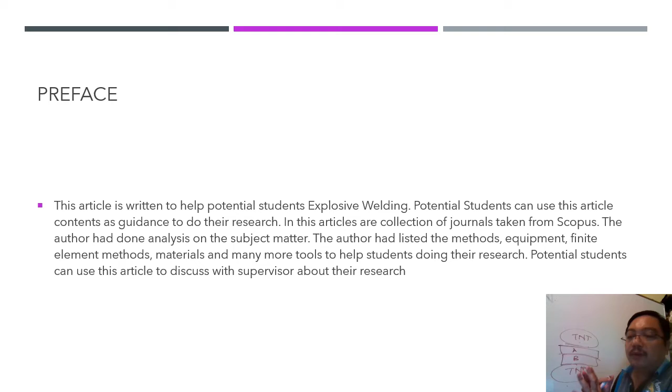You can use this video as a guidance, especially at the end of the video you can see the tools, the equipment, the software, the machinery, and all other things you might want when doing this kind of research or any other related research.

Many have done research on explosive welding. There are 485 results in ScienceDirect. You can go for Scopus, many results. You can go for Google Scholar, again many results on explosive welding.

Let us see. This is the potential for chapter one. Chapter one talks about the general statement. This is some of it: metallic powder directly deposited on titanium alloy, because some of the materials naturally cannot be connected to each other because of material size.

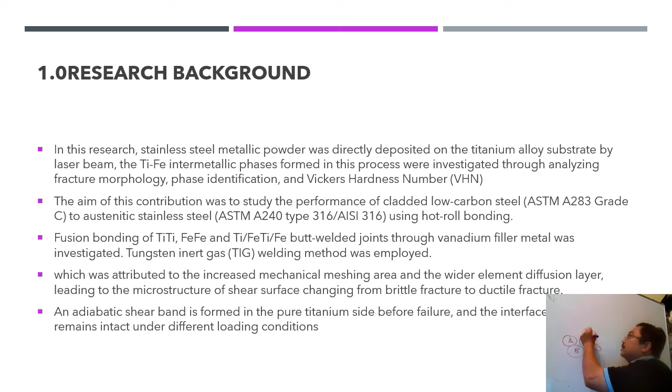Maybe the particle size sometimes is big. Particle A is big, so how can it connect to particle B, because it's the same size? You have to use tremendous force given by explosion, then it can connect. If you do the pressing, the forging, the power does not enough - the press power does not enough. You have to use explosion, and the heat from explosion is also very powerful to connect.

Then there's more contribution studying the performance of cladded low iron, low carbon steel using hot roll bonding, fusion bonding. This is another advantage when using explosive welding, because fusion bonding on different materials - materials that naturally cannot be connected - when provided with force and heat, can be connected.

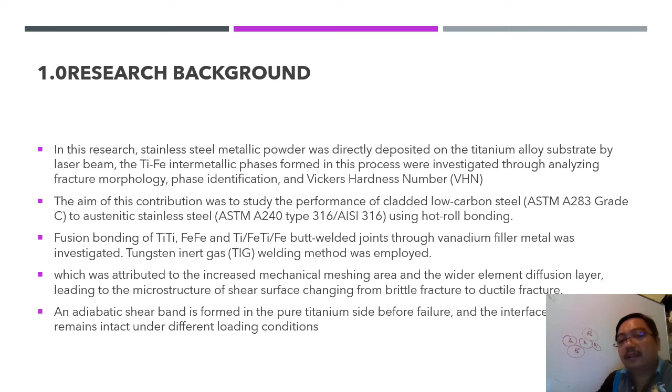Increase in mechanical meshing area, wider element diffusion layer, microstructure shear surface - maybe some of the material will become stronger, you do not know. And adiabatic shear band is formed in pure titanium before failure and everything. This is among the background research people have done.

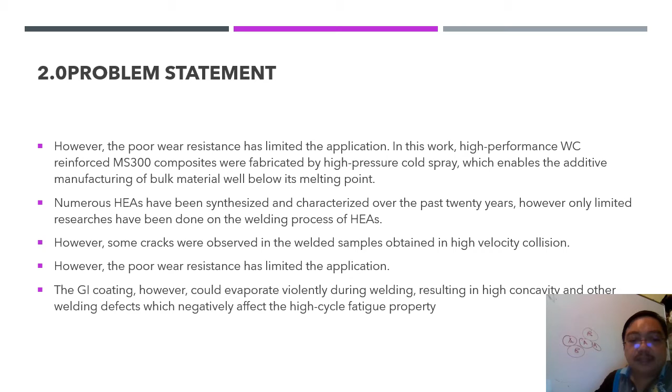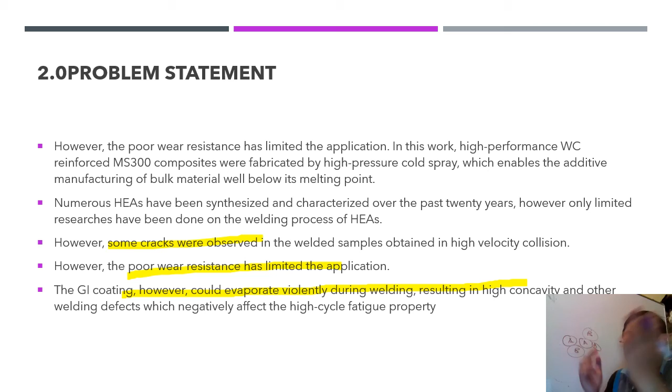This is the problem statement: poor resistance, of course, because the explosion time is so fast that it cannot be bonded together tightly, and cracks may happen - as I said, cracks may happen here - and poor wear resistance. Coating evaporated during welding, of course, because of high heat, so any coating can go away. This is among the problem statements that people have found, which may give you some idea to do your research.

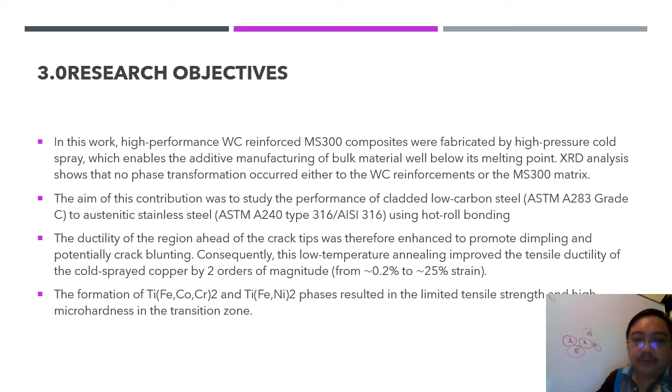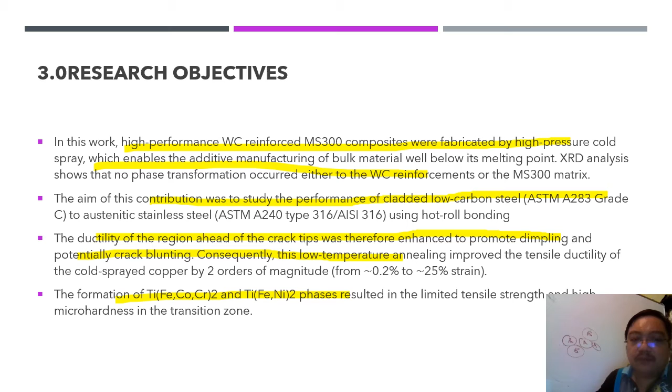This is the model research objective for high pressure cold spray performance of cladded low carbon steel. Ductility of the region ahead of the crack promotes dimpling and potentially crack blunting. Formation of titanium phases resulted in limited tensile strength.

This is micro hardness in the transition zone. This is among the problems, meaning that when you are connecting together because of explosion, the process is too fast, in milliseconds, and the joint part is not that strong. It's not that strong, the joint part. This is some of the problems that you have to encounter.

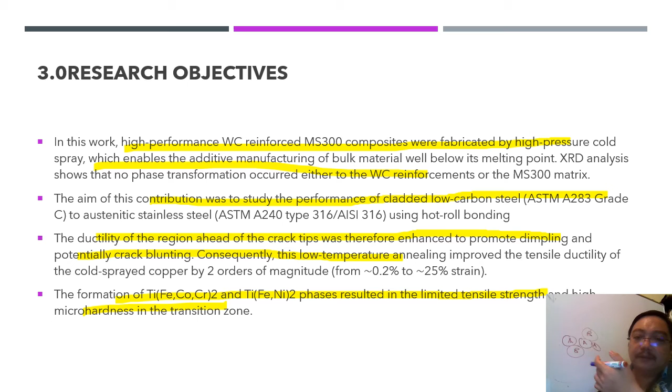This is some of the results that people have already done, and you can use ideas from it to expect your result. Maybe fortunately for you, before you are doing your research, you also have an idea what the outcome of your research will be.

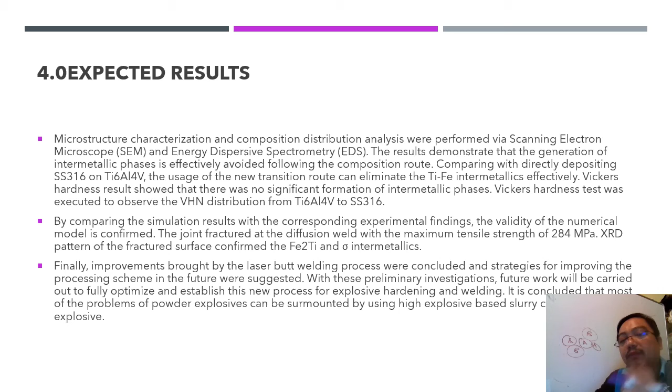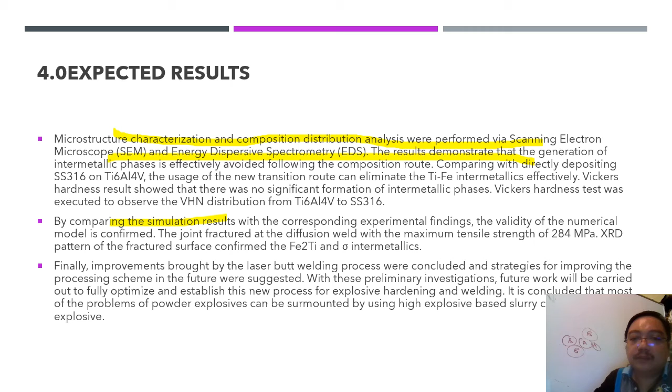This is microstructure characterization and composition performed by scanning electron microscope, energy dispersive spectrometry. Correspondingly, validity of the numerical model is confirmed. Some researchers use simulation, and then they predict what will happen. Then there's improvement brought by the laser butt welding process.

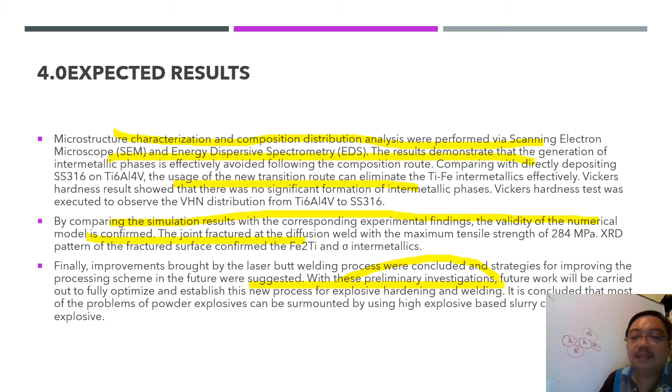All of these statements, I and my student, take from the abstract, and you can download the abstract for free from the internet if you have access to ScienceDirect. Of course your university must have the access. Most universities must have the access for ScienceDirect, so no problem.

This is the part that is interesting to you, because normally most students sometimes miss the experiment, they miss the analysis. This is what this video will help you with. This article will help you.

I put just a little. If you seriously want to do this research, you can acquire the full document at the end of the video. The tests I have just mentioned a little bit.

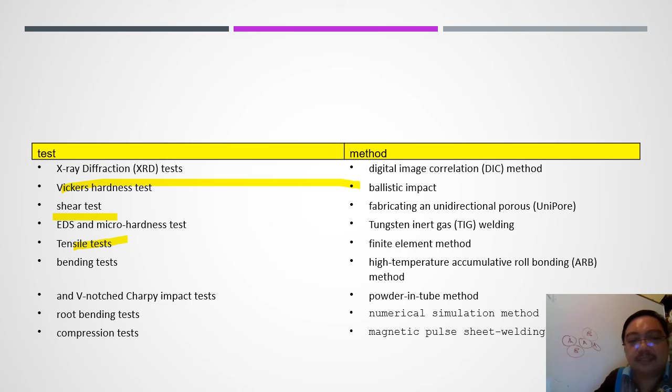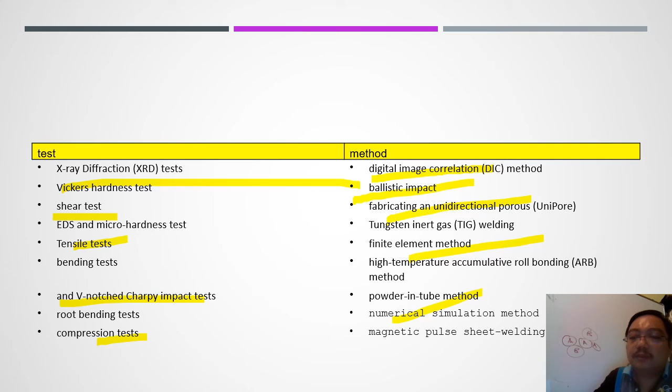Explosive welding is not limited to only metal. You can use powder also. It's called powder, and you can sinter it on the spot. This is the challenges for powder.

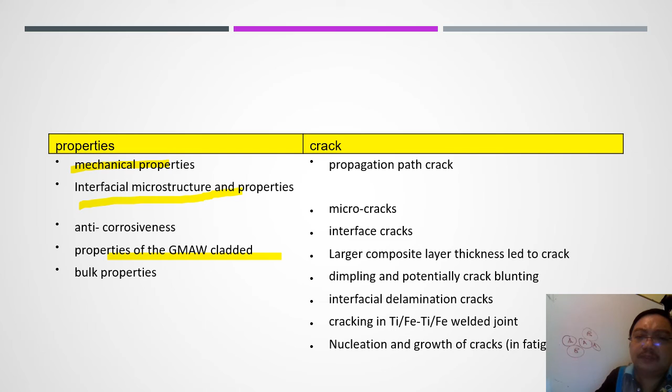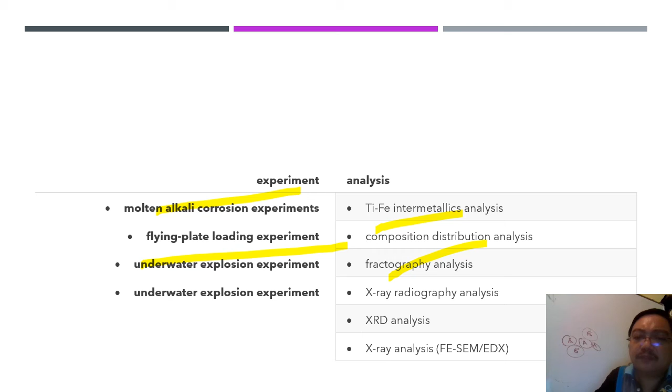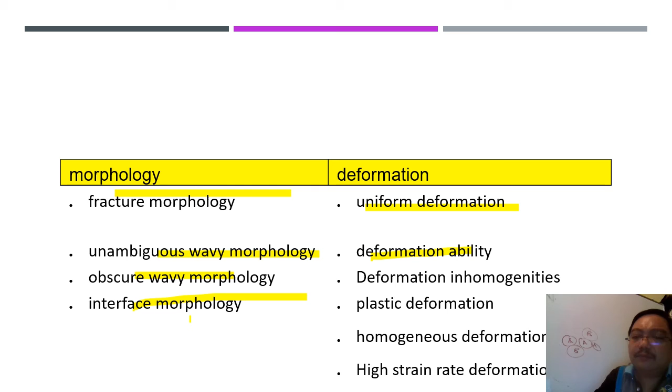Believe it or not, if you do not have the method to do the analysis, you may miss some of this. Then this video may help you. We already listed the strength that you have to study when doing this kind of research.

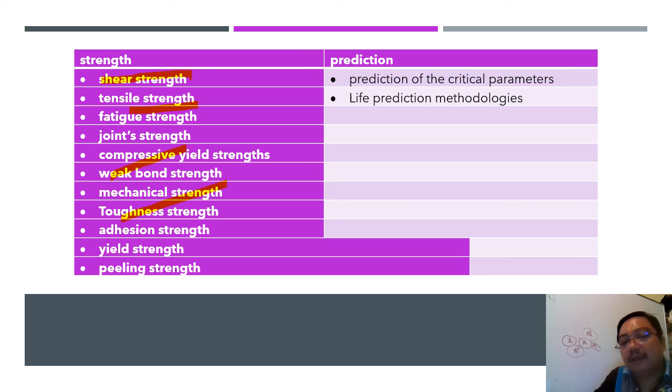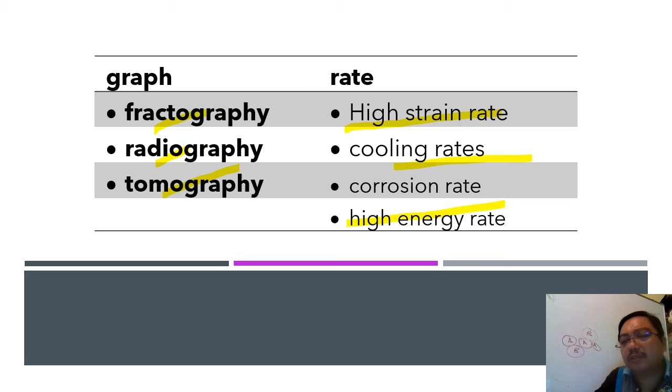Some of you may use the software Autodyn, this is dedicated software for explosion. There are many software options like LS Dyna, Abaqus, you may use also.

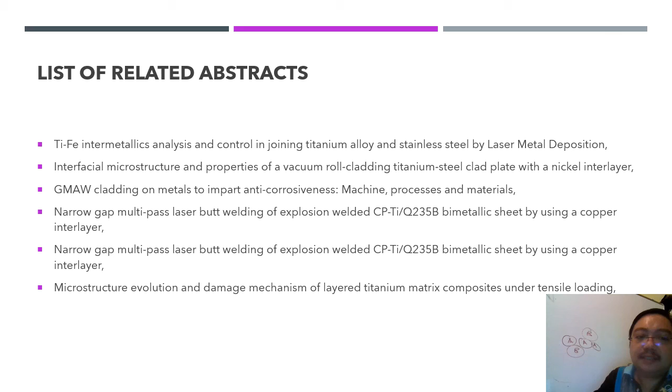And this is the related research. I just put a few. There are so many, I just put a few.